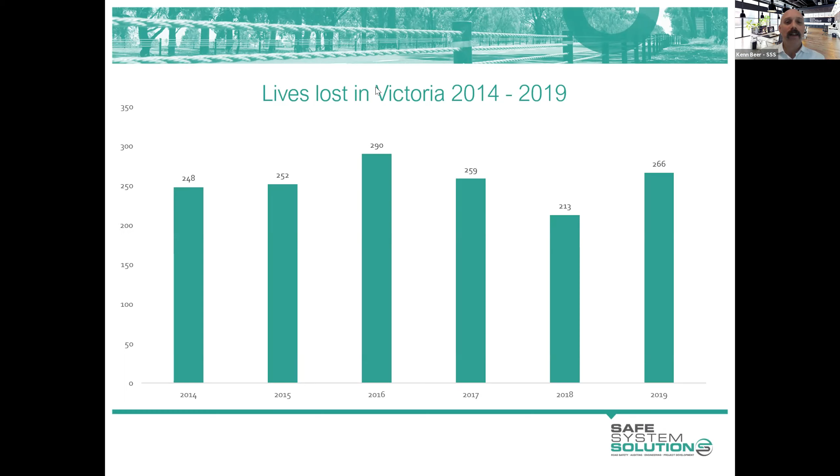I want to break this down a bit, still using Victoria, but this sort of data in terms of where things are happening percentage-wise is very similar across all jurisdictions in Australia, except probably ACT and the Northern Territory, a little bit more skewed. If you see here, we've got metro when we take fatal and serious injury crashes into account. We see that the metro areas are higher than the rural areas.

But if we just look at the most severe end of those, using fatalities as the indicator of most severe, it skews towards the rural areas.

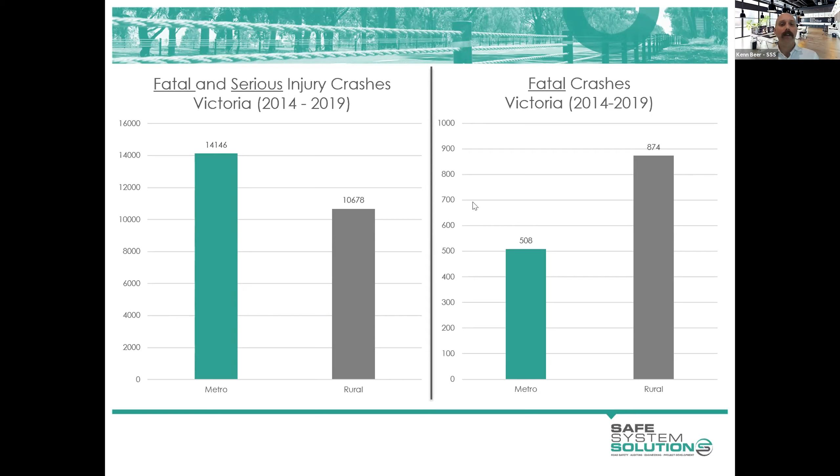And then again, to break things down a little bit to give us an idea of what sort of crashes are making these things up. If we look at fatal and serious injury again, intersection crashes are quite high. They stand out there in terms of the number alone. Then we see fixed object or rollover and head-on crashes there.

Now there's a number of other crashes in here before we get to head-on overtaking, but I wanted to put head-on overtaking in there because that's a common misconception when we talk about head-on crashes in road safety, that people think these are all people who make bad judgment calls on their overtaking maneuver and head-on crash. Well, no, the overwhelming majority are people who have drifted out of their lane, maybe drifted to the left and overcorrected and gone onto the wrong side of the road. So not intentional overtaking maneuvers that have gone wrong. Those do present a bit, but no, head-on is big.

Now I tend to categorize these run-off road to the left, run-off road to the right, and head-on, and combine them into what I call a lane departure crash. A lane departure is basically someone leaving their lane. So you can almost add that on top of the other categories. And we see that even for fatal and serious across Victoria, it's getting up there as the dominant source of trauma in terms of crash type, these lane departure crashes.

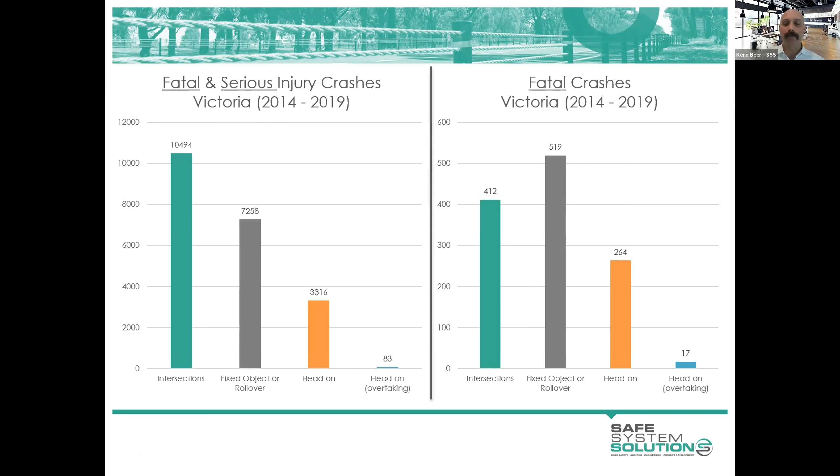Just, I suppose, in a couple of minutes, I want to touch on how we perform against the rest of the world. It's a bit of interest for you, but an acknowledgement that we've done some pretty amazing things in road safety, and we shouldn't be just down in the dumps about our performance. We've done some pretty amazing stuff. Here we see the fatalities per head of population, per registered vehicles, or per 100 million VKT.

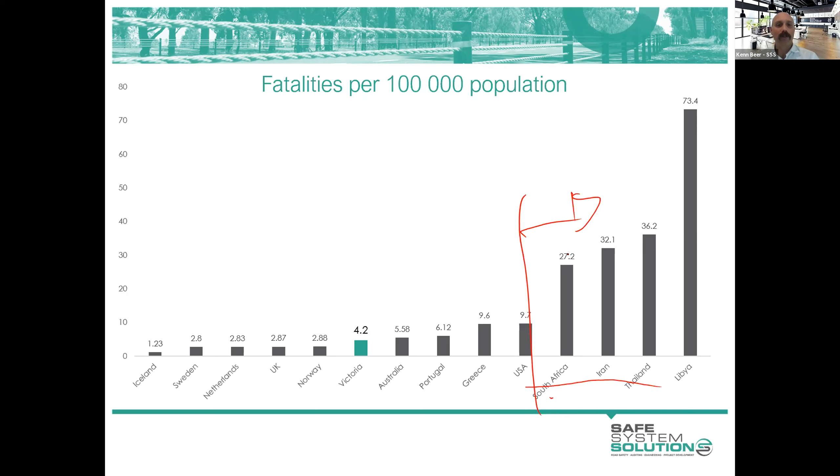As I said, one of the biggest sources of this trauma is when people leave the road and hit trees, hit power poles, hit other things. The violence of this sort of crash, and when I talk about violence of the crash, I mean the energy transferred to the occupant of the vehicle.

It is huge. This is what we would refer to as a point source hazard, a tree here. And so the energy transfer is concentrated, and the occupant of that vehicle is basically taking all of that energy in the form of deceleration in an extremely small amount of time.

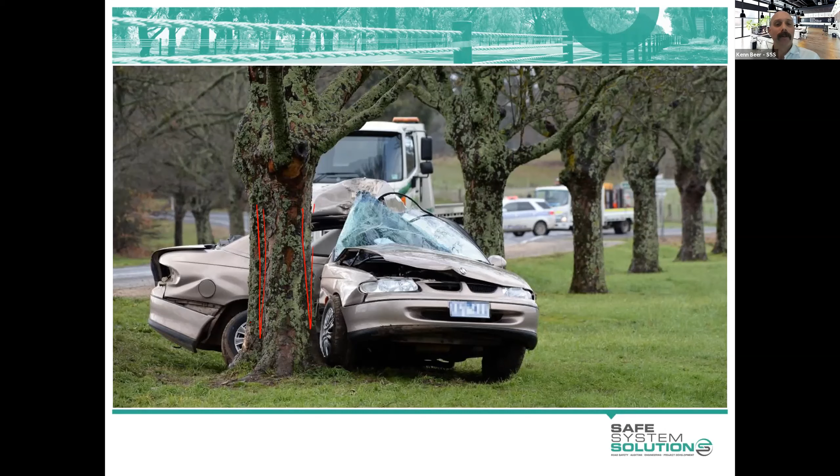What we understand about the energies that the human body can handle in these sorts of crashes, where the vehicle is yawing - that's sliding side-on - and it hits a tree like this. If it's a hit like that on the driver's side, the driver is unlikely to survive anything above about 40 kilometers per hour impact speed. It's pretty low in terms of the speed that we're traveling on a lot of our road network.

We see the same with power poles, point source hazard, energy straight into the occupant of the vehicle. And the really scary, extra scary part of this is as a vehicle leaves the road and strikes a point source hazard, there is a slight tendency for the vehicle to wrap around it a bit and the occupants to find that rigid point source with their head. And so we see a lot of acquired brain injuries and some pretty horrific trauma in these point source hazard crashes.

Head-on crashes can be survived at a bit higher speed, and the energy transfer is a bit less. That's because there are crumple zones, airbags, seat belts - they're all designed to cater for the energy of that frontal collision. So what we know is that somewhere around 70 kilometers per hour as the speed of each of these vehicles is what is generally survivable. Now, obviously, there's going to be cases either side, but that's the general sort of speed that we think about.

We know when vehicles leave the road, even if there's nice, cleared, open spaces, we still see some trauma. Now, these aren't as severe as hitting that tree or that power pole, the point source hazards, but vehicles rolling over are showing us a degree of trauma, more in the spinal injuries, again head injuries, but we do see fatalities as well in that. So even those cleared areas that we've provided for many years are still presenting us with some trauma in that sense.

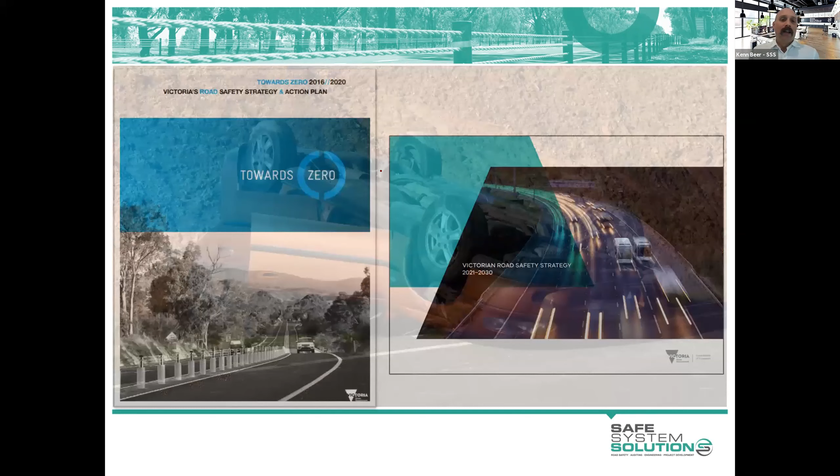So in terms of how we're going to deal with this huge trauma, it's no surprise to any of you, I don't think - barriers are going to be a huge part of it. They're identified in many jurisdictions, in fact all jurisdictions, road safety strategies are doing that. You see on the front cover of our previous road safety strategy, a big barrier system on the Melbourne Highway. I took that photo while I was doing the post-opening audit of that one, actually.

You can see there's a slightly different one on our newest road safety strategy in Victoria. There we go. We've got the New South Wales one, barriers. You know, there's no real surprise there, and other jurisdictions will see that. Barriers are going to play a huge role in us achieving some significant step-downs in that trauma level that we're seeing.

What we want to do today is ensure that we know the best ways those barriers can go in to save as many lives and prevent as many serious injuries as we possibly can with that investment, and to talk a little bit about where it's best to put them and some of the challenges that we might face.

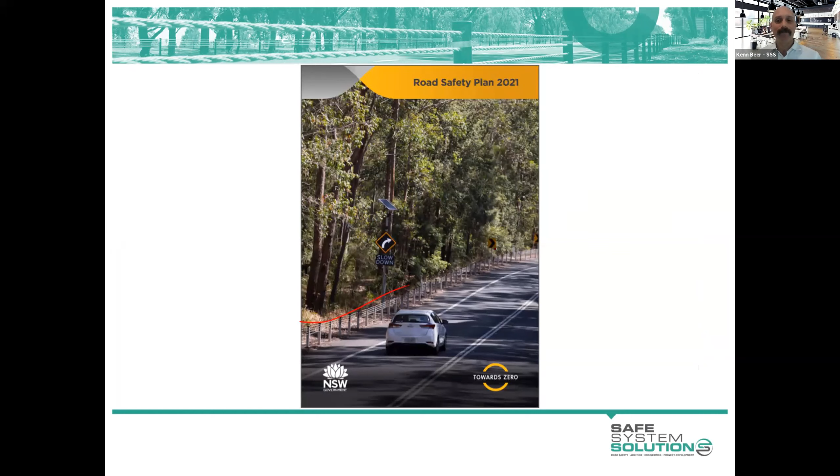And certainly we also want to make sure we're not creating new hazards when we put those barriers in, or if we have existing barriers, to be able to identify where they are hazardous.

Good time to be taking this course because there's been a recent update to the Austroads Guide to Road Design Part 6, which is roadside design, safety and barriers. That's that document there. So Jamie's going to talk you through some of that.

Another important document, and again a great time to be doing this course, is that we've just, or we are just transitioning to MASH. And MASH is the Manual for Assessing Safety Hardware, the protocol for testing barriers to say, well, this one passes the test, so it can be used, and this one maybe doesn't, so it's not MASH.

So you've probably heard that term MASH, and a lot of chatter about transition to MASH, and is that MASH compliant? Well, MASH is Manual for Assessing Safety Hardware, and Evan's really going to talk in detail about that tomorrow, so you understand what the barriers are able to do, or what were they tested to do.

And then when you're designing, maintaining, or the like a barrier system, you know how it's been tested and what ability it has based on that test. And if you're making design decisions in accordance with what it's tested at, that is much better than just blindly seeing a number.

Barriers are one of our most vivid, clear examples of safe system infrastructure. The reason for that, the safe system basically has these principles that says human bodies are vulnerable and we need to understand the forces on the human body and make decisions around that.

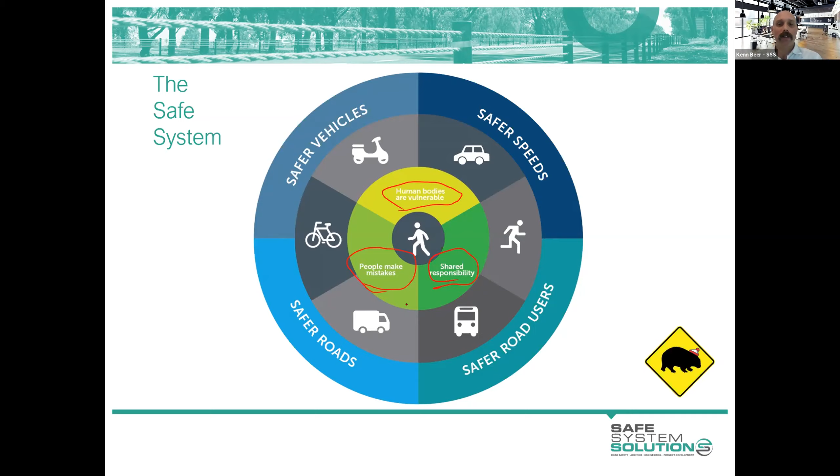Barriers just do not care what the mistake was. They do their job and they dissipate energy along the barrier over time and provide a friendlier stop of the vehicle than hitting a pole, rolling over, hitting a culvert, or hitting another vehicle in a lot of situations, in most situations. But Jamie's going to talk about all of that in much more detail.

Over to you, Jamie. Thanks, Ken, and good afternoon, everyone. So today is really about the role of safety barriers in addressing our road safety problem. In the next few sessions, we'll get into the ins and outs of the different systems and so on.

But for now, I want to continue talking about what constitutes a hazard in the roadside and when does a barrier provide a benefit in shielding those hazards. And it really is a bit of a changing space.

A lot of that change has come about with the update of the Austroads Guide to Road Design Part 6. It was released in August. It is the primary reference when it comes to designing safety barriers and assessing the risk of roadsides.

Most of the change with the new version was in the early sections of the document, which are around risk assessment and hazard identification, and there is a new process detailed in that document. A couple of webinars were run by Austroads last year. They're still available at the Austroads website, and I would encourage you all to have a look at those. I will introduce you to that new process later in this presentation.

So Part 6 is our primary reference. We also refer to the Austroads Guide to Road Safety Part 9. It is, however, quite outdated, and a new version of that is in the works.

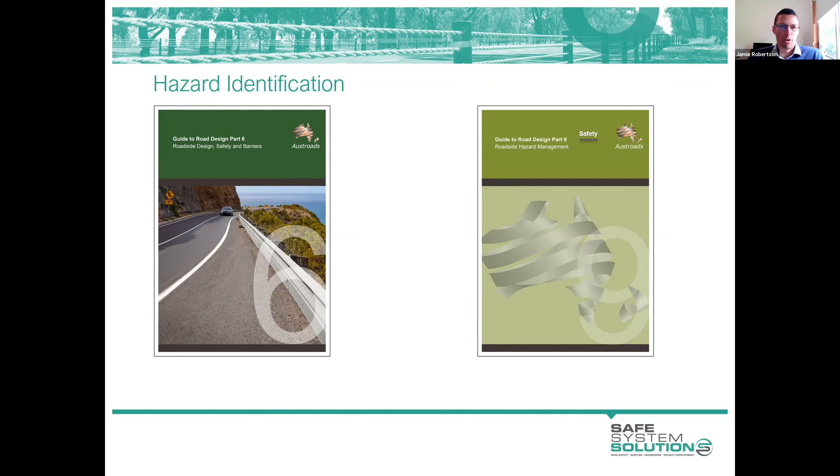With the Guide to Road Design Part 6, most, if not all, of the states provide their own supplement to that document. Victoria has more specific guidance around barriers than any other state, which is sort of a good and a bad thing. Its supplements are typically quite lengthy, and VicRoads did preempt the release of the updated version and put out quite a lengthy supplement in 2019. So some of the information in that document is now, I guess, redundant because it's covered in the new guide.

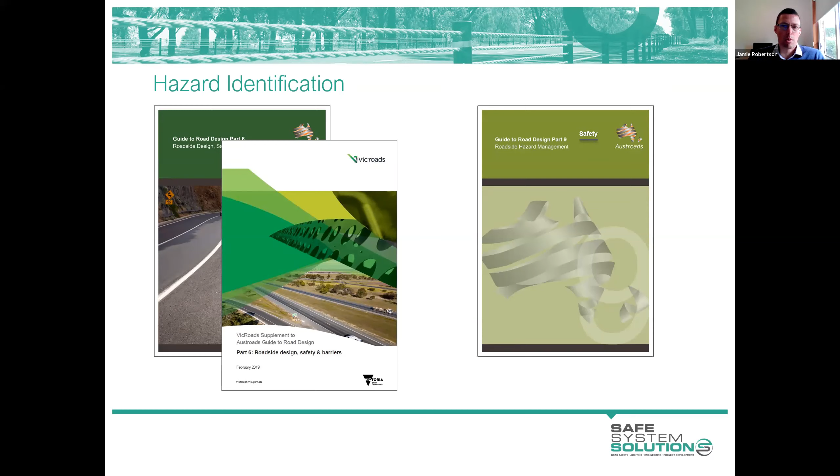State-specific supplements do take precedence over the Austroads guide, so always refer to your relevant supplement. RMS in New South Wales has a fairly brief supplement. I note that RMS, or Transport for New South Wales, is yet to adopt the new Part 6 and has not updated its supplement. I expect that they will adopt that imminently and that the supplement will be updated accordingly.

South Australia has a little supplement. We'll talk about the new risk assessment process that the guide includes shortly, and South Australia is a bit ahead of the game there in releasing some guidance around how to use that.

What the new guide does do, I think, is provide some clarity around assessing roadside hazards. It categorises hazards based on a trauma index, and the new procedure for assessing roadside risk uses these trauma indices. The first category and the most severe category of hazards is referred to as significant hazards. These are the ones with the highest trauma index, a trauma index that is sort of equivalent, I suppose, to striking something like a tree in the roadside.

Now, I will stress that these lists relate to the occupants of cars, of passenger vehicles. If you're riding a motorcycle, there are probably some more minor hazards that would be considered significant to that motorcycle rider. If you're in a heavy vehicle, perhaps some of these hazards are not so severe because of the greater protection and stiffer construction of heavy vehicles typically.

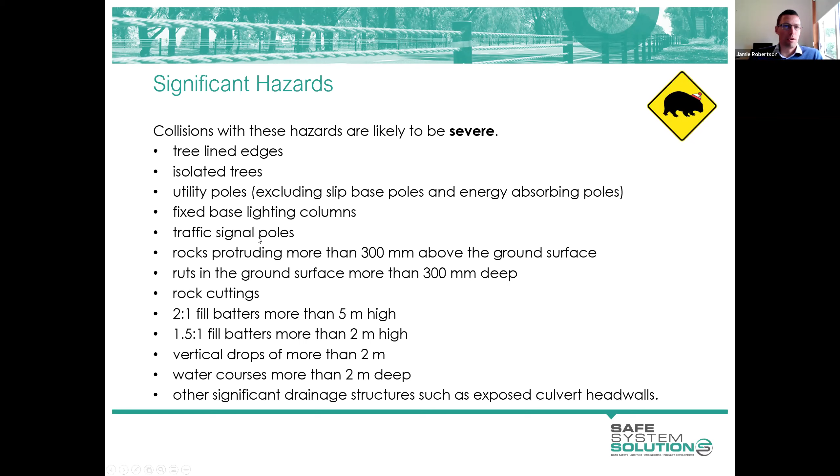Most strikes with trees are in rural areas. Most serious injury and fatal crash strikes with trees are in rural environments. In urban environments, it's more likely that those serious crashes involve a pole, a utility pole.

There is some guidance around when a tree is considered hazardous or non-frangible, and generally it's considered that if that tree has a trunk with a diameter of 100 millimetres or greater, measured at breast height, then it's considered non-frangible. The same could be applied to any timber object in the roadside.

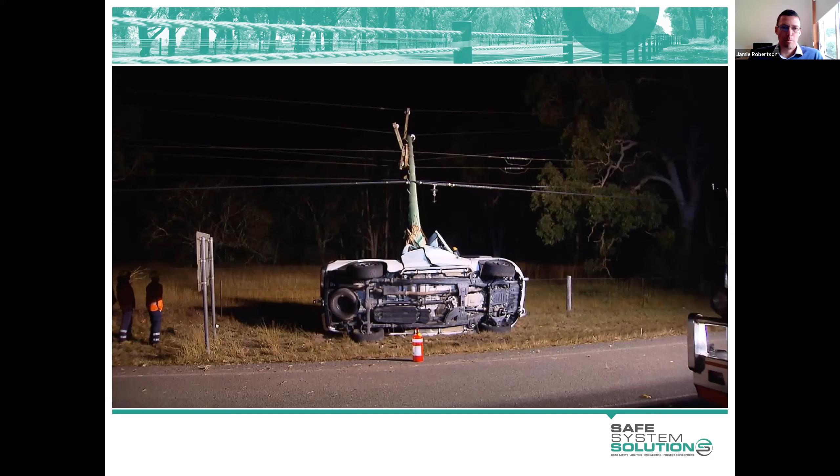Utility poles very much like a tree in terms of the risk that they present, and they really are often located in the worst positions when it comes to wanting to deal with them and address the safety risks that they present. This photo demonstrates that.

This looks like a utility pole. It's actually a rigid light pole, which I'm not sure if it went in before or after that safety barrier, but I would argue that barrier being there actually increases the risk presented by that pole. The vehicle that struck that barrier prior to the pole would be directed towards it. We also couldn't be sure of how that barrier would perform if the vehicle struck the barrier and the pole at the same time.

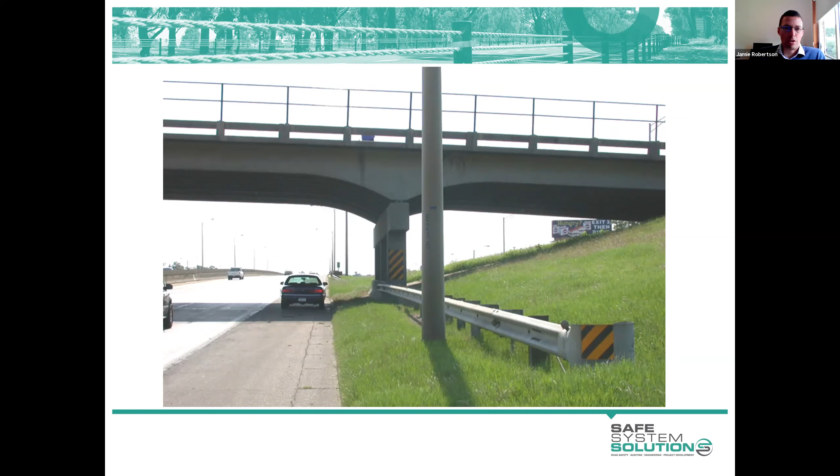So going forward, certainly in Victoria, we would typically see a high containment level system, at least a test level 4, and we'll talk about test levels and that type of thing soon, and perhaps even a rigid system, a concrete system. But it is important to be mindful when we're assessing roadside hazards, mindful of the potential for secondary consequences.

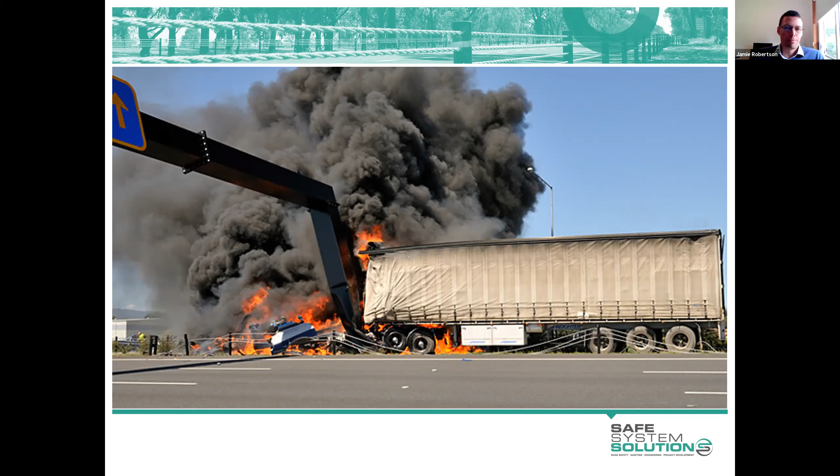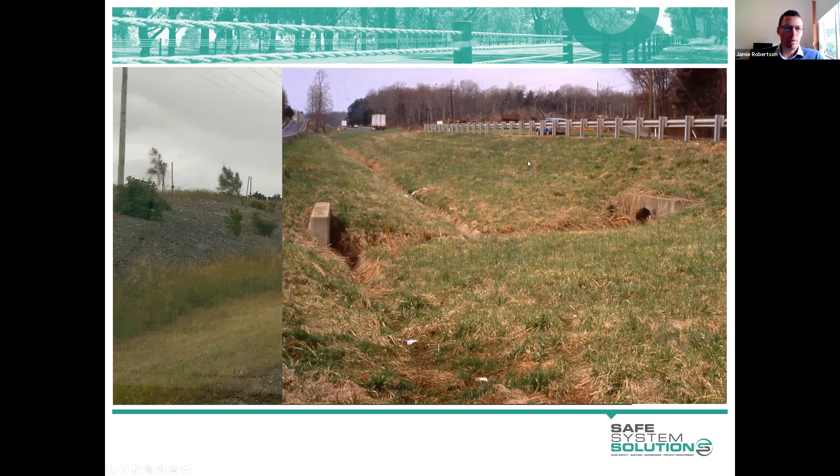Structures like this are hazards that you want to identify very early on in your design process. They are particularly costly and time-consuming to address. Now, this one arguably doesn't meet our criteria for a significant hazard or warranting protection because it's not a great drop. This structure appears on a project that I was involved with, and it was shielded with a barrier.

And because of the limited depth available over the structure, it required a structural design, a ground beam to span that structure, and a barrier with a bolt down post arrangement. So that was a very costly and time consuming process to make that happen. So I urge you to prioritise things like structures if and when you come across them.

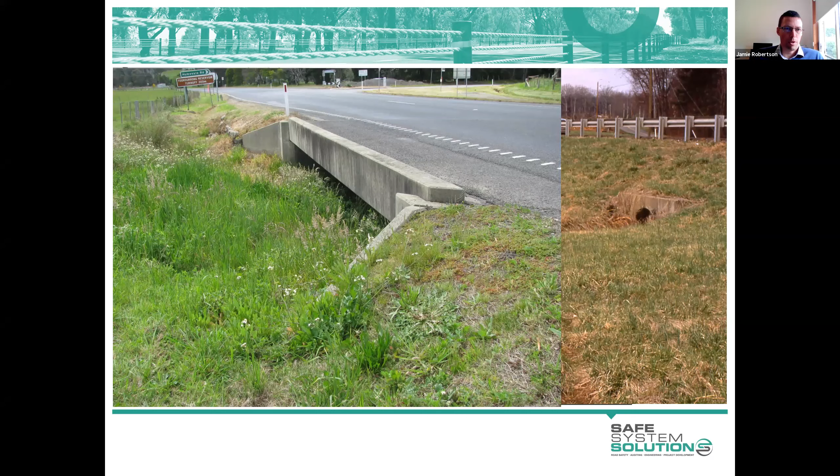There is some guidance around when fill batters are considered significant hazards or lesser hazards. And in general, an embankment or a fill batter that is relatively flat, say 6:1 or flatter, is not a hazard. It's considered recoverable, meaning that if you were to leave the road and were alert enough to steer back towards the road, you could do that. You could recover your vehicle back onto the road.

The key change that I want to point out here is that slopes of steeper than 4:1 are now considered hazardous. Previous guidance classified slopes in the range of 3:1 to 4:1, meaning 3 horizontal to 1 vertical, being a 3:1 batter, or 4:1, as you can see here. So slopes in that range of 3:1 to 4:1 were previously considered traversable, meaning that you couldn't recover your vehicle back onto the road, but you could traverse them without rolling over, in theory.

The change has come into the new guide that slopes any steeper than 4:1 are now considered non-traversable or hazardous. Now, there is a little bit of an inconsistency across the Austroads suite of guides around fill batters now, but I expect that other parts of the guide, such as part 3, will be updated accordingly soon.

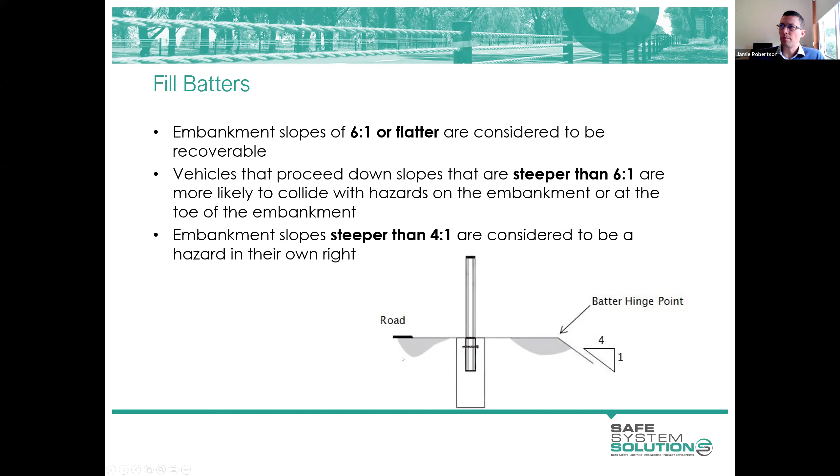Cut batters really are quite a subjective thing to assess in terms of their risk. There is some vague guidance in the Austroads guides about what cut batter does present a hazard. Certainly it was more vague in the past. There is some better guidance now, but it really does come down to the surface of that cut batter.

If the surface is fairly smooth, there's a school of thought that the cut batter will act like a rigid barrier and redirect that errant vehicle. On the other hand, if the face of the batter is rough, it's likely to snag an errant vehicle and does present a significant hazard.

Cut batters often appear in locations where we're really constrained for space. So the decision to install a barrier can be a complicated one. We often don't have the space to install that barrier at a desirable offset. There are often other features in play that complicate things. There might be a curb, and we'll talk a bit more about that shortly. So it really is a case-by-case situation.

Where we do have cut batters, you often do find there's a table drain at the base of that batter, as you can see here. And where that is the case, there's a further increased risk because a vehicle that enters that table drain, depending on the slopes involved, may snag at the base of the table drain. So the Austroads Guide to Road Design Part 3 provides some combinations of foreslopes and back slopes, as they're called, that are considered non-hazardous or certainly are preferred.

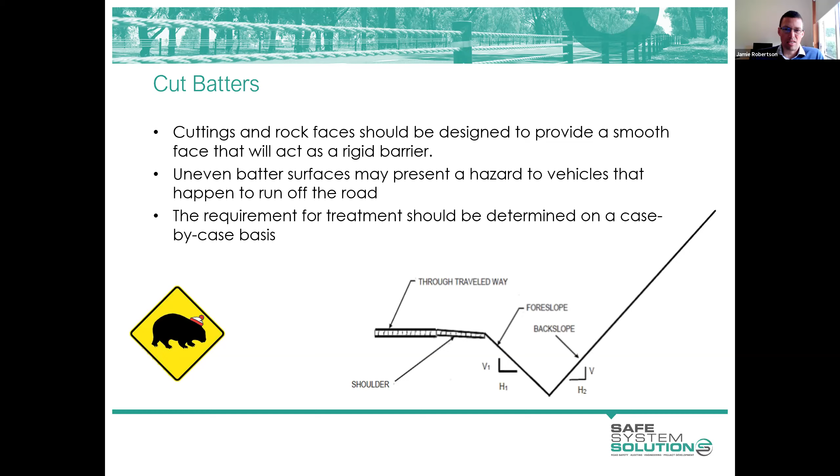There's a cut batter with a rock face. It's certainly not smooth. It's somewhat jagged. There is a table drain at the base. It's not a location where you'd want to depart the road. But you can also see that it's on the inside of a curve. There's not much of a shoulder to work with there if you were to install a safety barrier.

If a safety barrier went in there, it would likely obstruct sight lines to the pavement around that curve. It would limit the space available for someone to move off the roadway if they had to, or if they broke down there or had to stop in an emergency situation. So on balance, installing a barrier at this location would probably create more of a problem than it would solve.

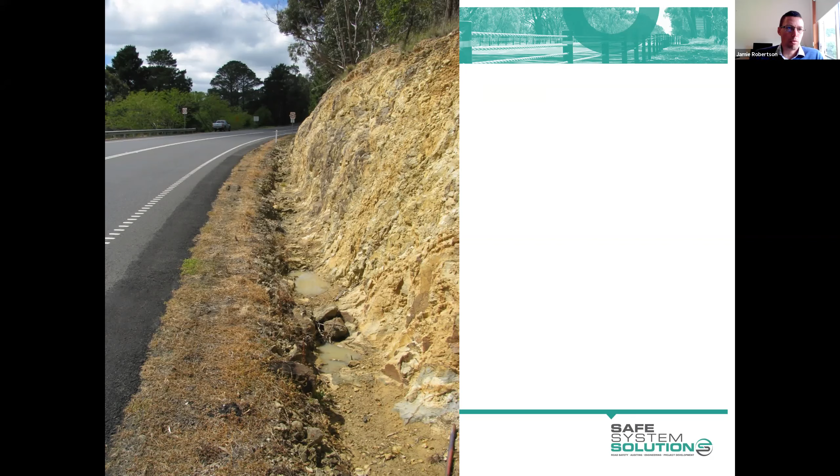Further up the same road, we have another cut batter. It's a smoother face, so probably less hazardous, but again, there's not much room to play with. There's a curb as well, which really does limit our options in terms of where we would locate a barrier in relation to the road.

It's on the inside of a curve again, and we know that the frequency of run-off road crashes is reduced on the inside of curves. So the likelihood of someone departing the road at that location is probably low. And again, installing a barrier here would not be a good idea unless we were to undertake significant widening.

Cut batters can be deceiving. This is one that, and I really wish I had a before photo, but it was a nice, smooth, grassed batter, but there'd been recent rain and it was really quite soft, and the impacting pickup truck there really did create a divot, and enough of a divot to cause that vehicle to flip and roll. So what may seem a relatively nice smooth and safe cut batter may not be.

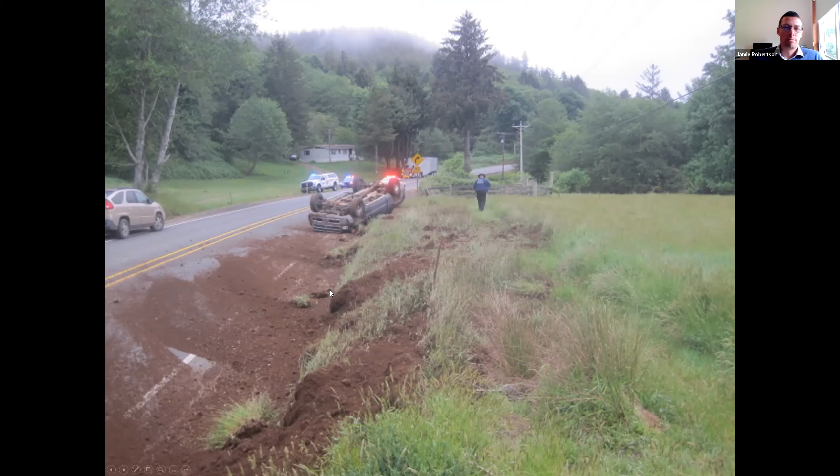So the next category of hazards is referred to as less significant hazards. Again, primarily based on the severity of crashes involving the occupants of passenger vehicles. In this category, we've got things like frangible light poles, fill batters that are lower and flatter than those in the significant category, rocks and other objects that protrude above the ground, but not to an extent that they would cause that vehicle to stop abruptly, shallower watercourses, and so on.

So these are ones that I suppose in general would be unlikely to result in death or serious injury, but certainly would result in property damage and perhaps some injury to the occupants of errant vehicles.

Now, when considering any of these hazards, we really need to be mindful of likely impact speeds and angles with these hazards. In a low speed environment, probably a lot of the hazards that appeared in that significant hazard category are not hazards. So for instance, a tree or a pole very close to the roadway in a local 50 km/h environment would not be considered a significant hazard, and it certainly wouldn't be shielded with a barrier. But in a high speed environment, it certainly would be a significant hazard.

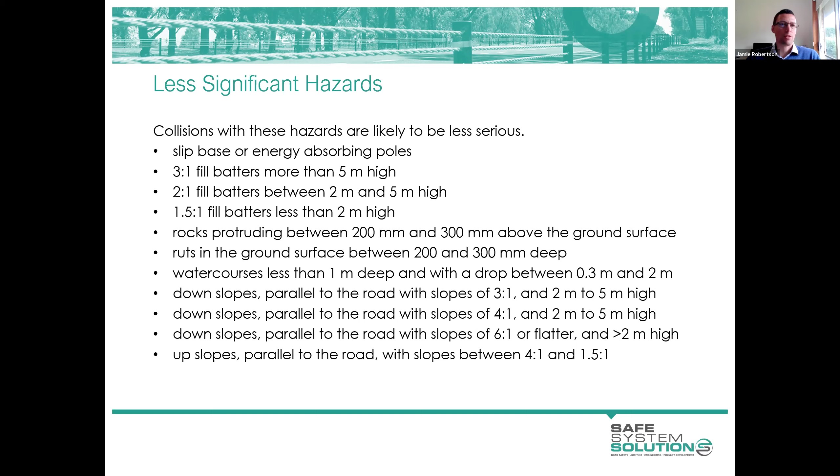That really is quite a shift from the previous edition of the guide, which made a point of encouraging practitioners to consider safety barriers as hazards in their own right, and it certainly can be the case that they are. But with the introduction of more flexible systems, the newer technologies that are around now, there's more learning and research. The evidence is overwhelming that a flexible safety barrier certainly provides a benefit as compared to not installing a barrier in the vast majority of cases.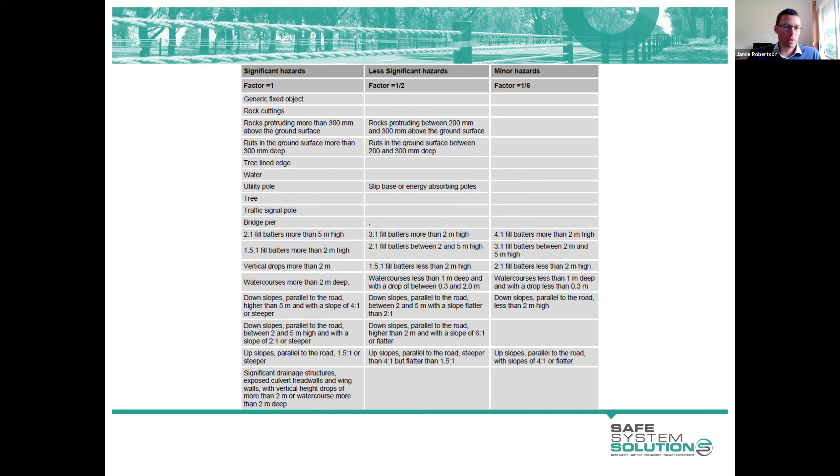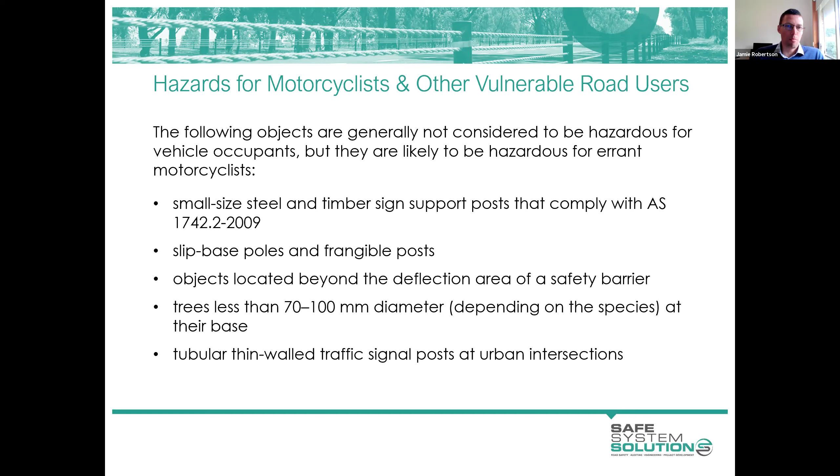As I mentioned earlier, some lesser hazards certainly may be considered hazardous to motorcyclists and other vulnerable road users. Kenn will talk about this more next Tuesday. Some of these hazards that are typical hazards for motorcyclists include our typical steel and timber sign support posts, perhaps our 50mm nominal bore steel posts that we use for most of our standard signs. Frangible light poles certainly are not frangible for an errant motorcyclist. Trees of diameter smaller than that 100mm magic number, and so on.

Jamie, we just had a comment come in around, so you're talking about culverts and some challenges there, but a product with increased post span ability up to 6 meters, so omitting posts up to 6 meters. So is that around the sort of maximum you've heard of? Yeah, it is. Generally speaking, it's acceptable to omit one post for any barrier system.

So doubling the post spacing for that one span. The 6 meters, I think you're probably referring to a detail that Safe Direction provide for the Ram Shield product, where you can achieve a 6 meter clear span if you've got culverts that you need to straddle. So 6 meters is about as high as you would go, but for any barrier system, you can typically achieve 4 meters, not a problem. 4 meters is the rail length for our flexible guard fence products.

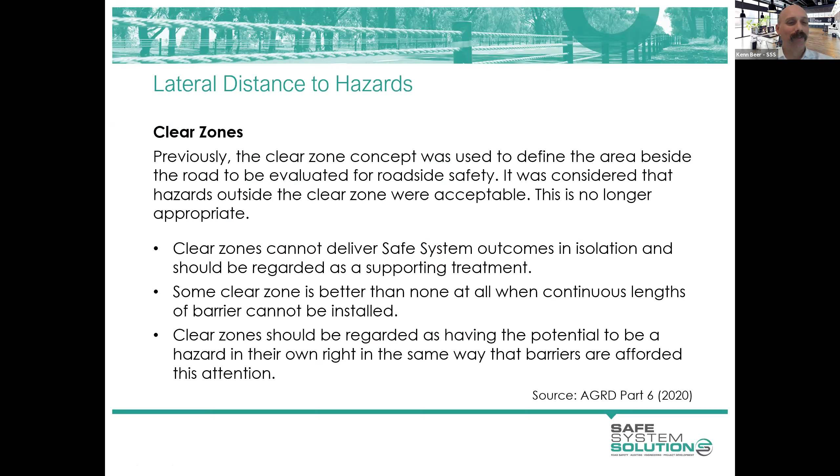Yeah, in one of the later modules we get into some of these design challenges and things that can be done, and Jamie has lots of different examples of a few of those things. They're really good questions about some of those challenges, what you can and can't do with these systems. We do talk generally about products - we don't have any alliances with any of the specific suppliers, so we'll just talk generally. But if in these cases there's one product that does something different to others, we'll certainly mention that, and that's about knowing your products and what they can do. That's pretty much what your assignment is all about, but we'll get to that.

Lateral distance to hazards. I'm sure that most of you have heard this term clear zone. Clear zones have been done away with in current guidance. Clear zone thinking is based on some theory that makes sense - the further an object is from the road, the less likely it is to be hit. And in the past, we drew the line at some magical clear zone numbers, beyond which we decided not to treat hazards. In high-speed environments, that number or width was typically 9 meters, or perhaps up to 15 meters in a high-speed, high-volume situation.

We know that a proportion of errant vehicles, in the order of 15%, will travel beyond those clear zone widths that we traditionally have adopted. And when we're striving for safe system outcomes, we're just as concerned about those 15% as any other 15%, and we're looking to do better. So it's no longer a defence to say that we've shielded everything within the clear zone, or we've treated everything within the clear zone. We need to look to do better.

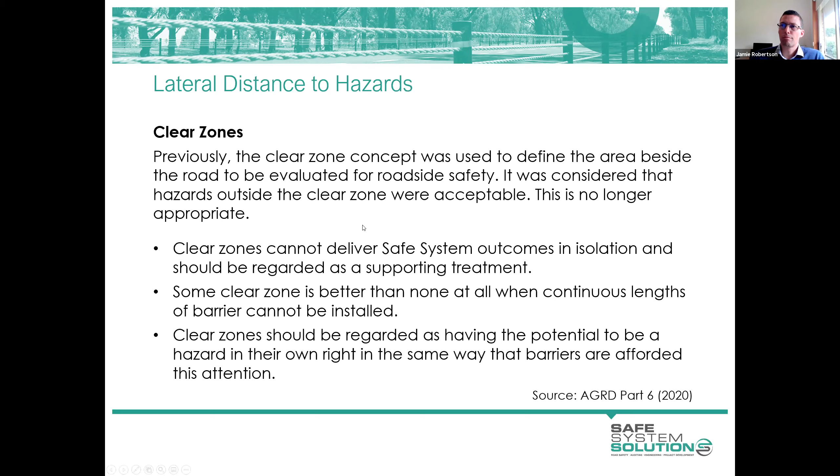It is the case that vehicles frequently do roll over on what you might perceive to be a nice flat roadside. When a vehicle yaws violently, someone reefs the wheel around in an attempt to recover, it's often enough to cause the vehicle to flip and roll. It's a very difficult thing to do to ensure that a roadside or a median is maintained with a flat, even and well compacted surface through all seasons.

There have been a number of pieces of research in recent years that have quantified the areas you might like to provide to achieve safe system outcomes, and they're a hell of a lot greater than the old clear zone numbers we've adopted. In a high-speed environment, 100 km/h, you'd need to provide a very wide, 40 or 50 metre wide area that is flat and well compacted to achieve an equivalent level of safety to providing a flexible safety barrier much closer to the road. These widths are simply not feasible, so safety barriers are a much more attractive option.

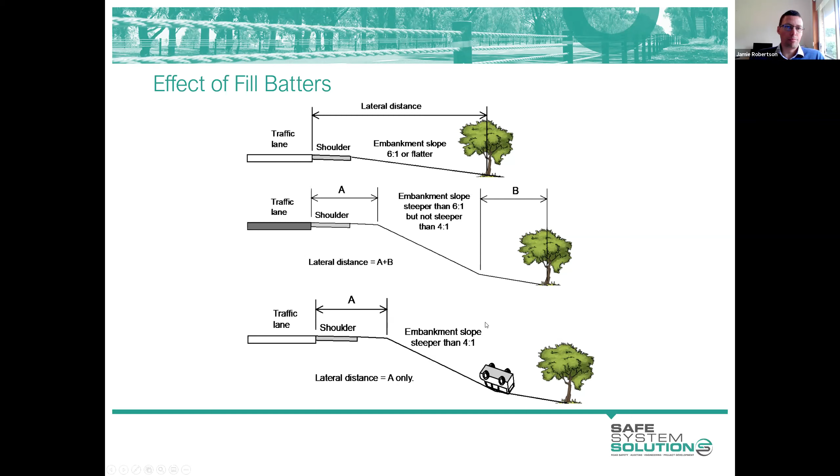Now I do want to introduce you to the risk assessment process that the new Part 6 provides. There are two webinars on this topic that I encourage you to look at — they're accessible at the Austroads website. I want to give a brief overview without going into too much detail.

The new risk assessment process, rather than focusing purely on clear width or the proximity of a hazard to the edge of the road, takes into account a number of things. It uses a typical risk assessment process looking at exposure, likelihood, and severity of crash. The outcome is to determine what's called a Network Roadside Risk Intervention Threshold score, or NRRT, for a particular section of road. It's a numerical score you can use to compare the risk of different road lengths, different roads altogether, or different lengths with different characteristics along the same road.

Each jurisdiction is currently doing work to provide guidance to practitioners about target values for the NRRT. South Australia is leader of the pack there, I think Queensland might not be far behind, and Victoria's got some things in the pipeline. But stay tuned for some guidance from your jurisdiction about target numbers and what that actually means in terms of prioritising your efforts and expenditure.

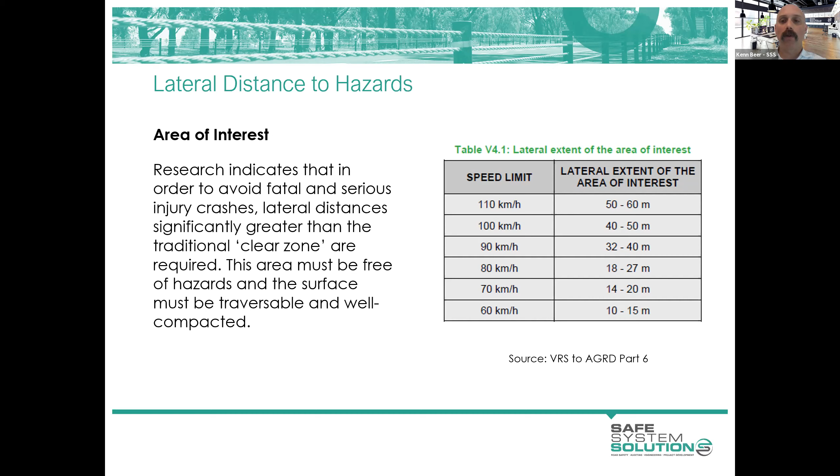No, that's right, but I can give a bit more. That table actually comes from some research, and it will reflect the speed zones used in the investigation of crashes where all the data was collected — so those will be the speed zones where the crashes came from. That was work from MUARC, the Monash University Accident Research Centre, also with the Centre for Automotive Safety Research at the University of Adelaide, who combined their efforts on that one. Good question though, and as Jamie said, better to use operating speed or design speed.

NRRT is certainly something people should be getting familiar with — that terminology will help you in the very short term if you know what NRRT stands for in your quiz, coming up at the end of this module. Hint, hint. But it's certainly something all road authorities are heavily working on at the moment, to a degree, to replace the clear zone theory and thinking that most jurisdictions have been operating under.

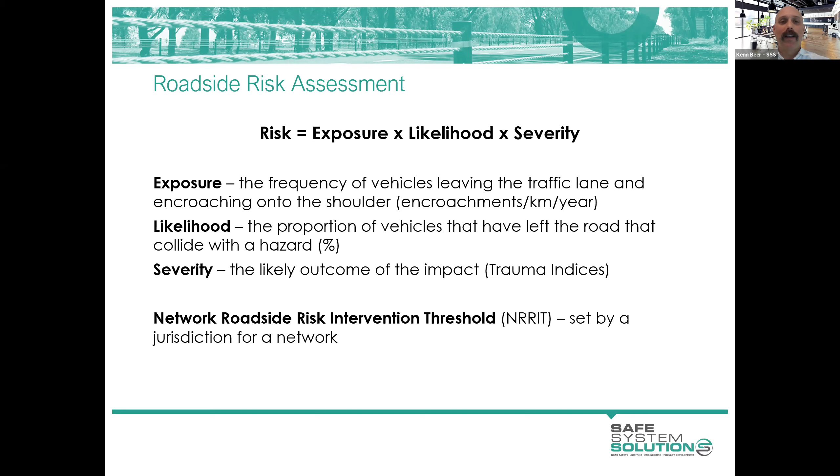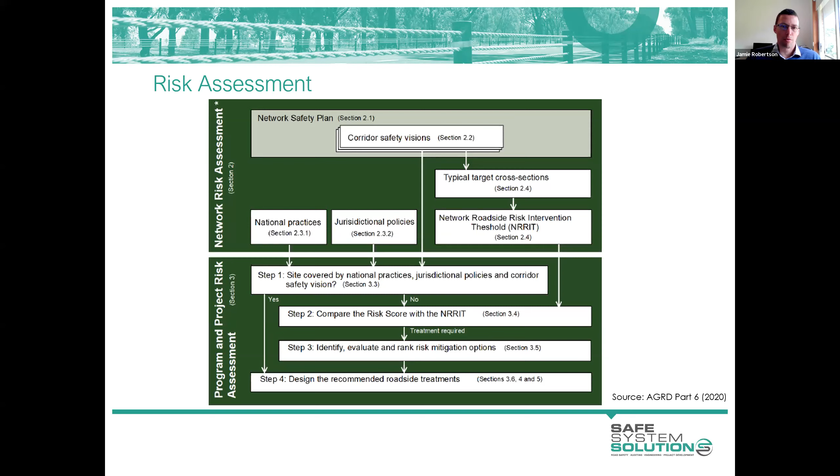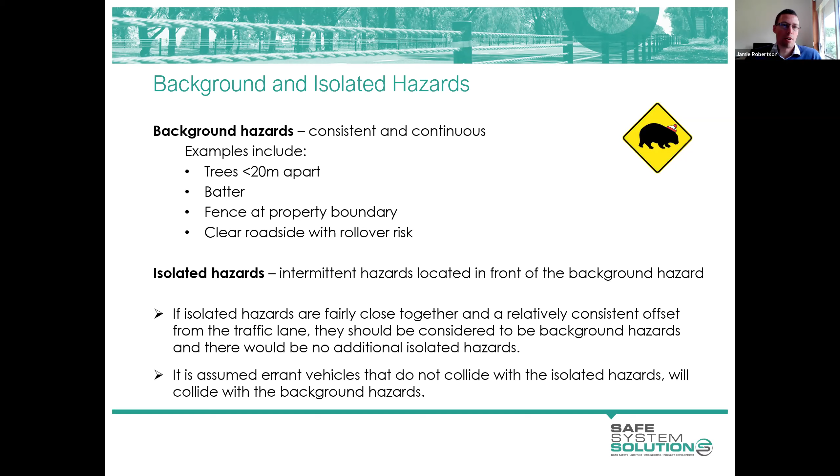It's often the case that we have a background hazard, and then we have some more intermittent hazards located in front, which are our isolated hazards. That might be trees, poles, or other hazardous objects located closer to the road than those background hazards.

The guide provides a whole heap of charts. There's a different chart for each combination of locality—rural or urban—terrain type—mountainous, rolling or flat—and operating speed, broken up into 70, 90, and 110. For each combination you have a different chart to look to, and you choose the one that best represents the conditions you're dealing with. There might not be one that matches exactly, but choose the one that best represents it—it's acceptable to interpolate between lines if and when you need to.

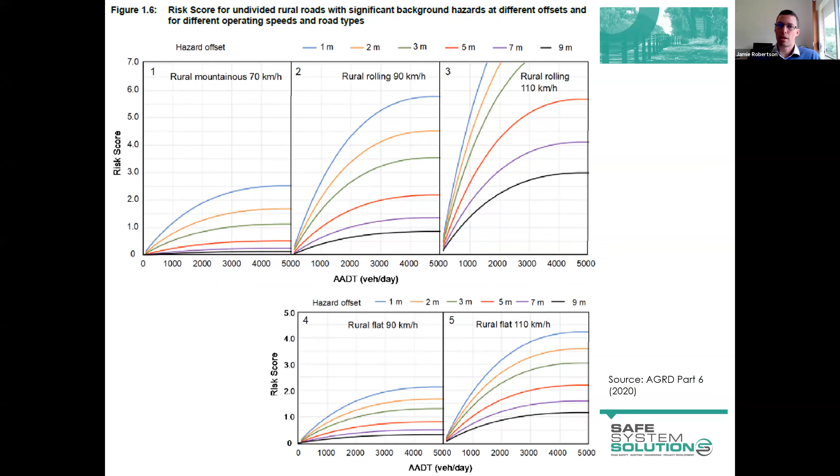You can use the same process to assess different lengths along the same road that might have differing traffic volumes, hazard offsets, operating speeds, terrain types, and so on, and come up with a score for each of those different sections.

That answers one of the questions that just came in about how to work out the risk and where to find information about the risk of features of the roadside—it's the Austroads Guide to Road Design Part 6, the new 2020 version that's come out, using these tables which give an indication of the risk score.

What you can use that for is comparing the risks of different hazards that are currently there, but the choice on whether or not a barrier system is required relies on the NRRIT score, which needs to be set by the road manager or road authority.

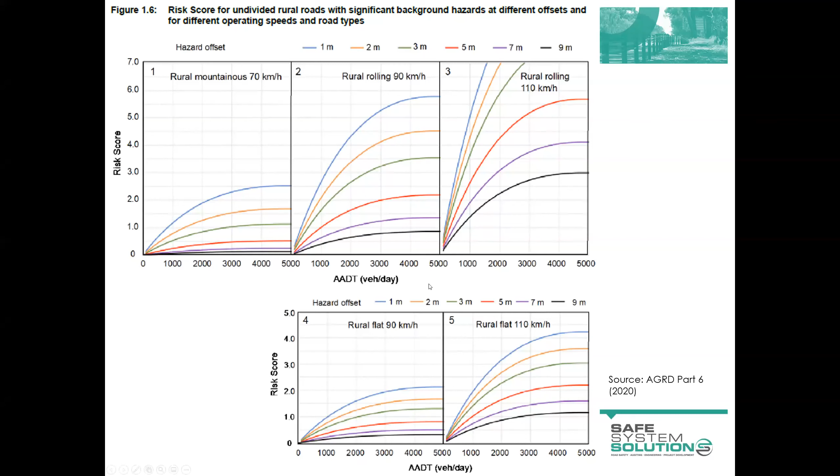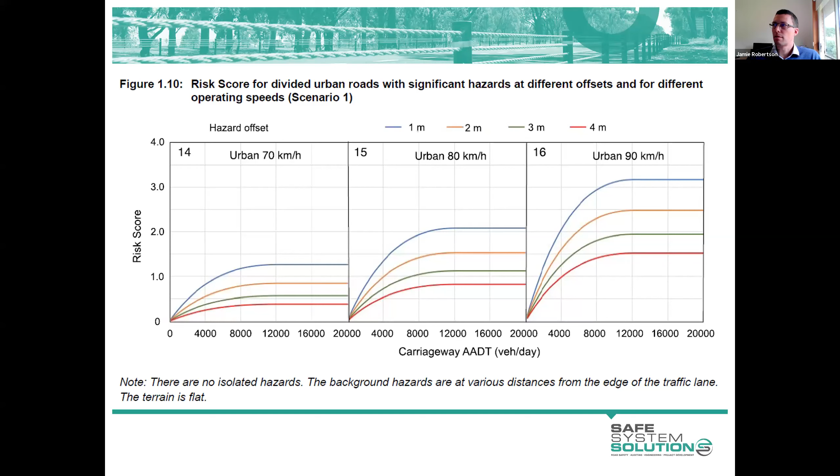Right, so we've assessed our roadside risk, and now we need to think about what to do about it. The guide lists these different treatment options. It previously provided a treatment hierarchy, and the preference was to look to eliminate or remove hazards before treating them with safety barriers. That is certainly no longer the case, and I don't think it's any coincidence that safety barriers now appear at the top of the list. So installing safety barriers to shield roadside objects is our primary safe system treatment.

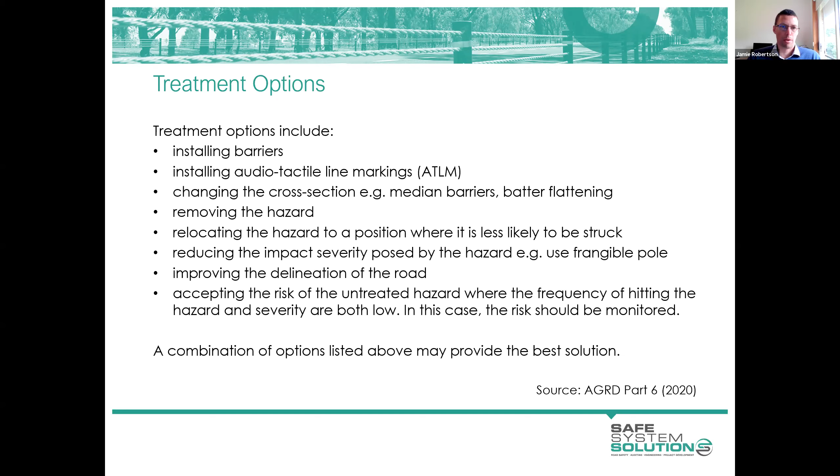There are other things we can do to support safety barriers or reduce the likelihood of people departing the road and striking roadside objects, like improving delineation and so on. If we remove the hazard, it's doing something, but it's not eliminating all risk because there remains that rollover risk, the potential for vehicles to travel well beyond the distances we previously assumed for clear zones. It is usually the case that a combination of these things is the best treatment. So installing barriers really is number one.

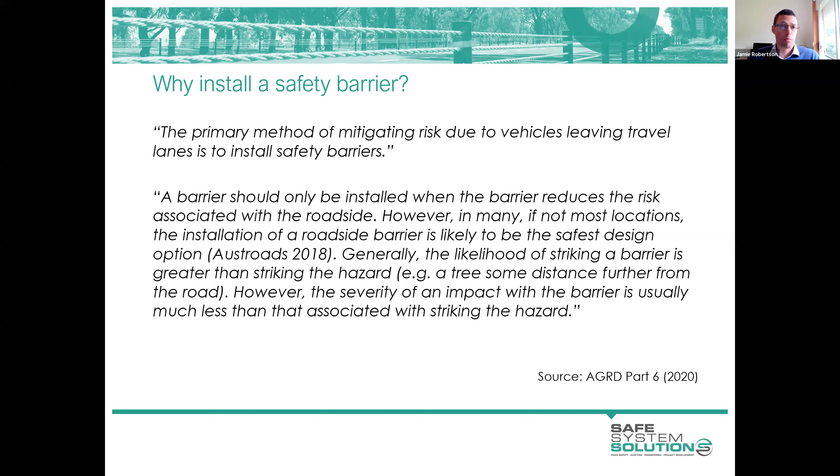That said, we must consider the potential risks presented by barriers, especially where they're not maintained adequately, or if they're not designed in the best way. It is the terminals of barrier treatments that present the greatest risk, and some of the now superseded terminals are the prime candidates, and can result in spearing type incidents, as you can see here.

So the old breakaway cable treatments, things like MELTs and so on, are now legacy products in different jurisdictions. Certainly we should see no more installations of those, and they should be progressively upgraded on the network to the new and improved breed of products.

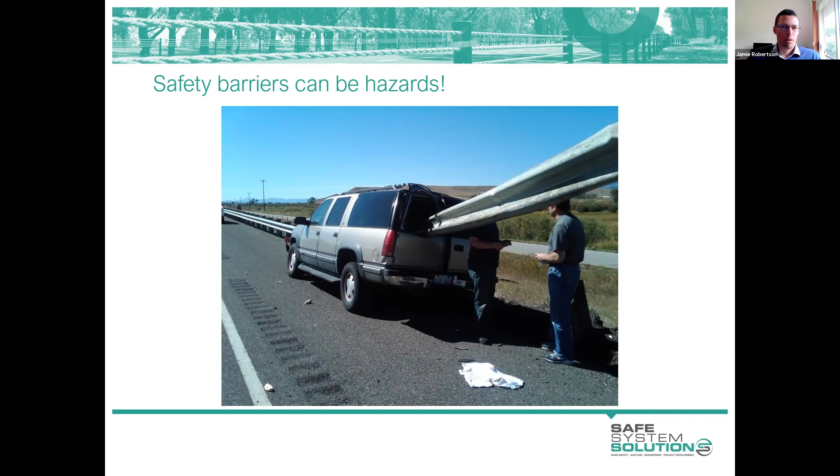Another instance where a breakaway cable terminal was struck. Fortunately, on this occasion, it didn't spear into the vehicle. It was fortunate that the vehicle was contained without entering the roadside, but that easily could not have been the case. Another disadvantage of these types of products is that they're entirely gating, meaning their entire length is ineffective in redirecting an errant vehicle.

The intention of these older systems was to allow the vehicle to pass through the terminal and into the roadside, whereas the newer products are largely redirective. A vehicle that strikes them side on will be redirected, and a vehicle that strikes them end on will be brought to a controlled stop.

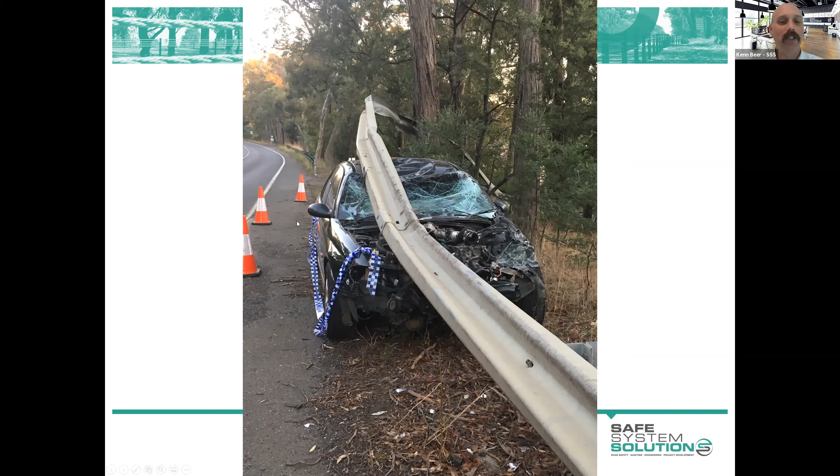Oh, it's pretty good to me. Nice shiny new barrier system.

Okay, it's coming in. Oh gee, I'm loving this. My challenge is keeping up here. Okay, Callum in there with one: Fishtail, a terminal, and Naomi in second with poles not behind the barrier. It's sort of in the middle of the barrier there, isn't it?

And then an absolute flood of answers came in after that, which are all very good stuff, and you're all picking the same things. I'm just scanning through to see if anybody else had anything different.

Callum also put in there a bit about the footpath potentially being in deflection zones - good thing potentially to look at. And nobody mentioned the proximity of the curb to barrier, which is an interesting one as well. But there you go, Jamie. And Catherine's even adding no rub rail, so thinking of other road users, not just cars, thinking of the motorcyclists - we'll talk about that one next time.

But hang on a second, so it was Callum and Naomi. Good. All right, the others - just maybe it was all about internet speed, really. All the answers came flooding in. Very good, though. Back to you, Jamie.

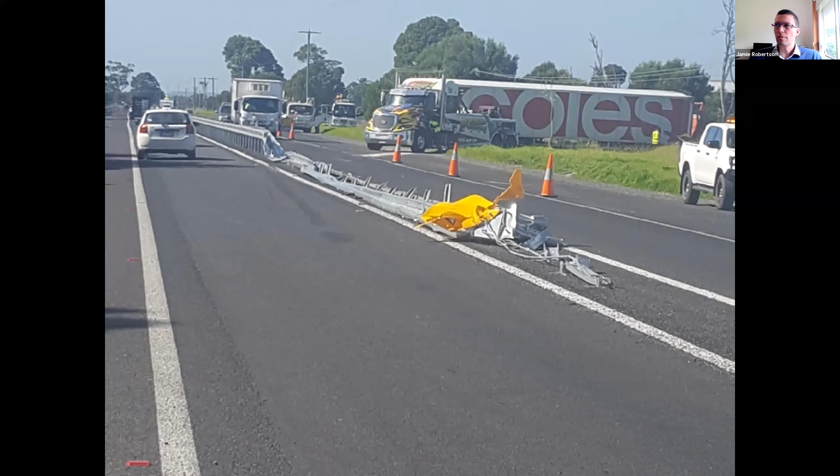Another location was struck. In this case, we had a wire rope terminal, a newly installed wire rope down the median. The road was yet to be restored to its proper speed limit. It was still under traffic management. And this terminal and a fair length of barrier was taken out, presumably again by a truck.

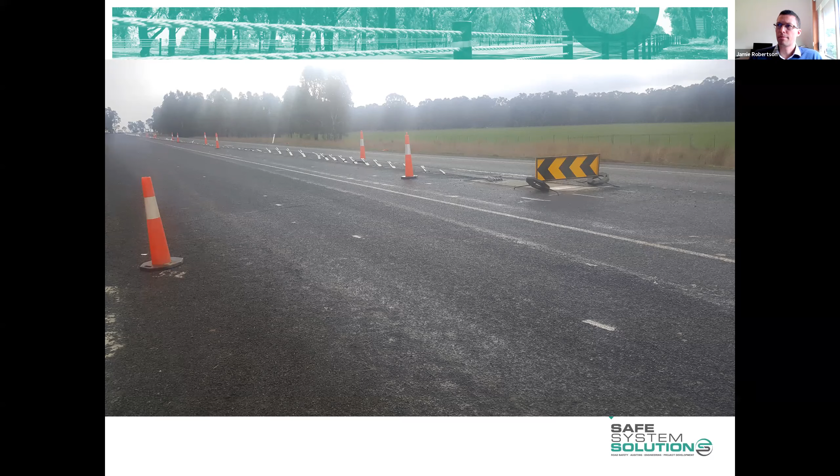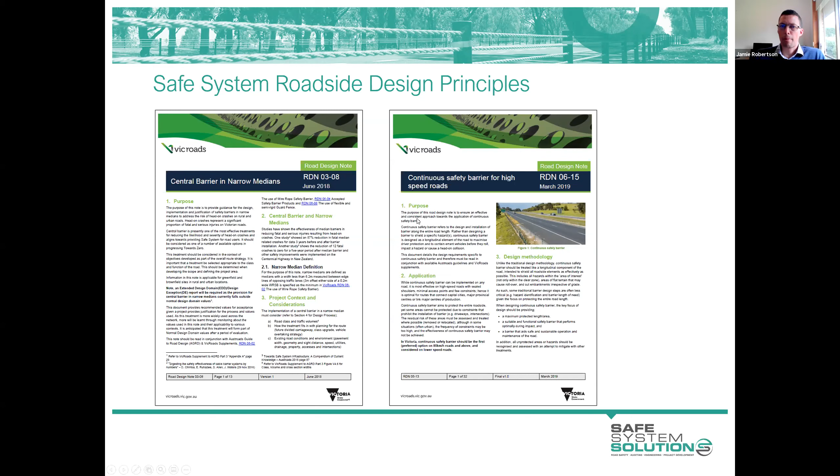I suppose I'll kick one off, which is something that bubbles around quite a bit. It's associated with this idea that remove the hazard is no longer the number one thing to do. And that sort of flies in the face of the hierarchy of control, really, doesn't it? If you think about it that way. Did you want to make some comment on that?

Yes. So there's removing the hazard and there's removing all hazards. We can remove a tree or a pole or the like and eliminate the risk associated with that particular feature, but there will always remain some inherent risk in a roadside. It might be other rigid objects located further away from the road. It might be that rollover crash risk.

So yeah, we really are going away from that. I suppose you could put removing all hazards at the same level as installing a barrier, but to remove all hazards would be to provide a very wide, clear, flat area in the order of 40 or 50 metres in a high-speed environment, which is just not a feasible outcome.

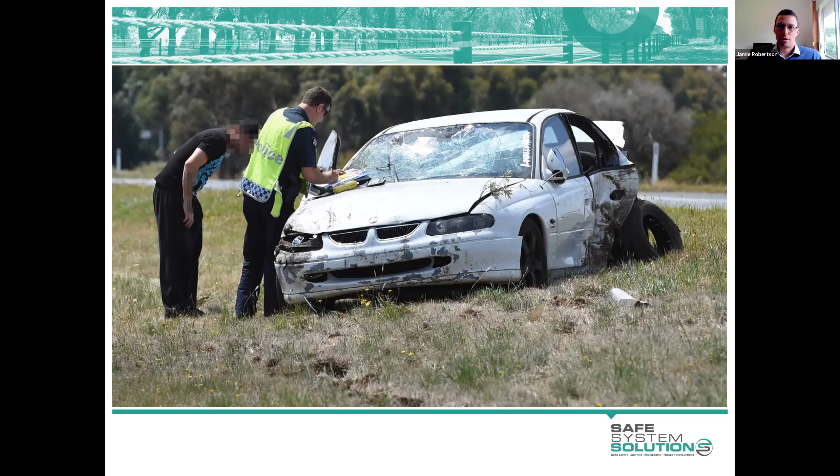Yeah, okay. That sort of links, I suppose, with the next thing I just wanted to touch on, which was the idea that clear zone theory is not accepted anymore, which is something that's been around certainly my whole career, and it's been around much longer than that. It's a pretty big shift for the industry. What was driving that, and is what we've got better or easier or clearer, or is it going to give us better outcomes?

Look, clear zone thinking really originated in the States in the 60s, and it was based on measurements of vehicles leaving tracks in snow, as I understand it. So if you think about the vehicle fleet and the conditions that research was based on, it certainly doesn't equate to what we encounter here. So its applicability is questionable. We do know that 15 or 20% of vehicles travel well beyond those clear zones. So it really just doesn't stack up under safe system thinking these days.

The new approach, is it easier to apply? Certainly it's going to take some getting used to. It does take into account a number of other risk factors. It's more of a multi-pronged look at things than purely lateral offset to hazard. So I think from that point of view, it's an improved tool. It does provide for better comparison between different lengths of road. So, yeah.

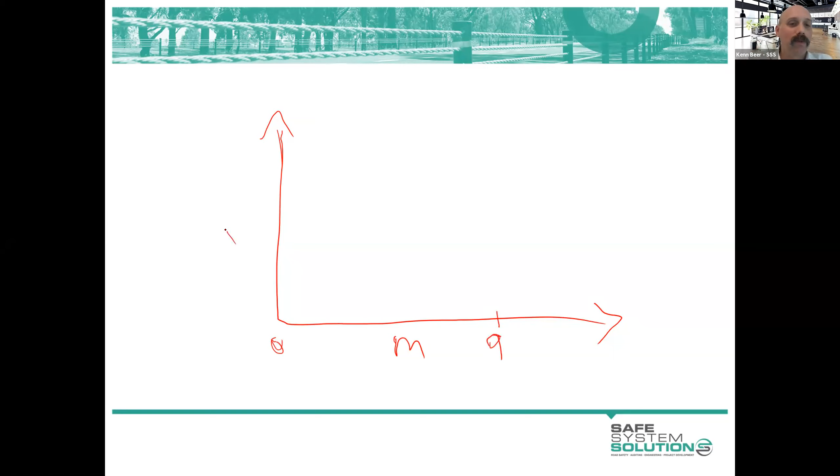I suppose one thing I'll just add to that is potentially a bit of the misuse of clear zone theory to a degree, and I do caution people in the use of the NRRIT and this new risk scoring methodology in the Austroads Guide to Road Design Part 6, where you find this risk score. There was a time with clear zone where, if you have offset distance here, starting at the edge line, and your clear zone was 9 meters, for example, and this was risk, it sort of went like this, down to 0,

magically at 9 meters. Whereas everybody, common sense wise, knew risk would do that, and maybe wouldn't actually get to 0. It'd sort of asymptote out as it continued out. But the operation was that at 8.9 it's a high risk point source hazard. At 9.1, it's outside the clear zone, don't worry about it. You had to draw the line somewhere, but it was that clear cut that apparently there's no risk. And we saw that play out with new roads, with rigid structures and poles just lining up at 9 meters throughout a roadway.

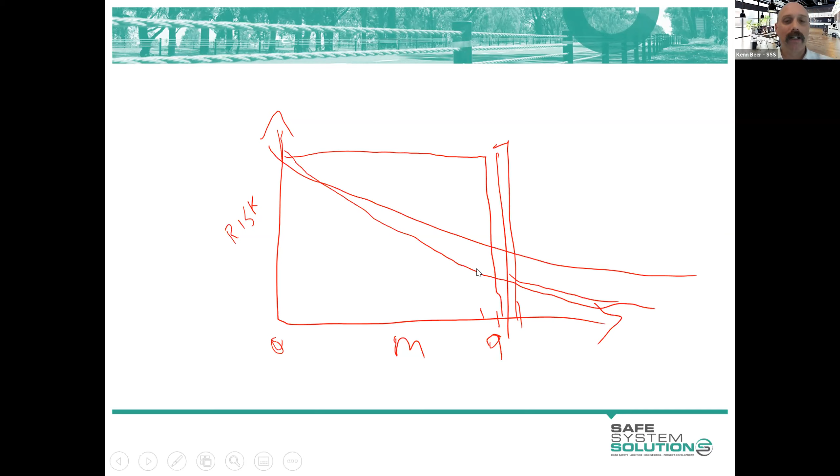So this certainly helps out. But even with this, you've got to recognize that hazards don't magically disappear in risk. It's just lessened, and the risk will remain. So I thought I'd just add that. I think it might help a few people get their head around a few of these things.

Now, how do I stop sharing? There we go. What have we got? We've got another question come in, I think.

Are end terminals required on all barrier types? Amy? Every barrier needs an end treatment of some type. Any guard fence barrier, or wire rope, needs an end terminal. In the case of guard fence, you can transition to a rigid barrier, which is your end treatment of sorts. Rigid systems need an end treatment, so that might be a crash cushion rather than an end terminal as such, but any barrier needs to be terminated with an end treatment that can be safely struck end on, if there is that possibility that a vehicle can strike it end on.

Yeah, and Evan Coulson on Thursday is going to talk you through the process of choosing those and which ones are accepted, and some different alternative options.

Another question here: is there a role for cushioning trees, so large shrubs, bushes, etc.? I assume that means in the roadside to act as a buffer and slow vehicles down. You want me to take this one, Jamie? About 15 years ago I commissioned a research report into vegetation as roadside countermeasures, and there was potential with some species that had the characteristics to do that. It was more that the practical implementation was such a massive challenge. You'd need to be sure you were keeping that species only, so it needs to be maintained. If vehicles did roll off into it, how do you get that back? You're replanting, and those sorts of challenges.